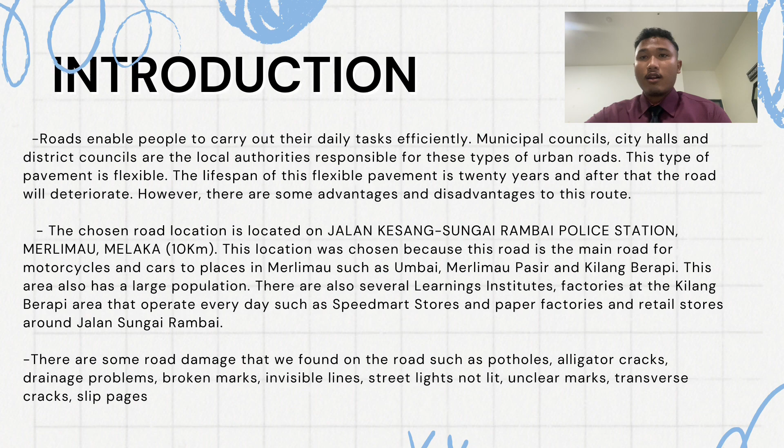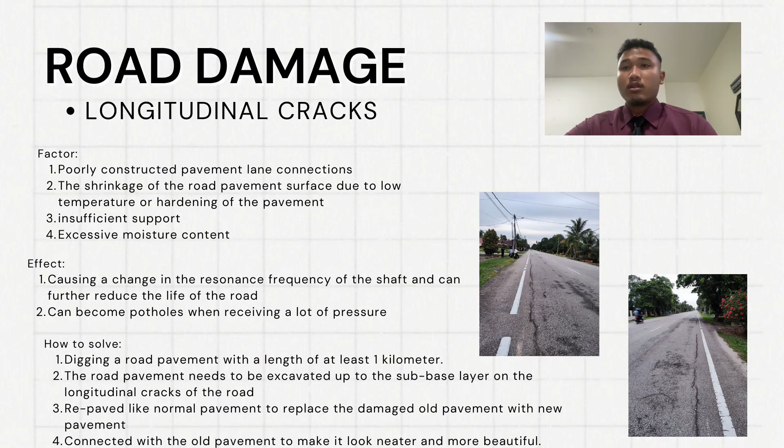At kilometer 1 Jalan Kesang, we found potholes. A pothole is a bowl-shaped hole resulting from local surface distress.

The factor of potholes is that they are caused by fine cracks that are not treated and become wider, until chunks of road surface material are dislodged and form potholes. The water that stagnates in the potholes easily absorbs into the bottom layer, gradually weakening the foundation of the road.

The effect is it can damage tires, cause a bent or broken wheel, loss of hubcap, and wheels out of alignment. It can also cause fatal accidents to motorcyclists when they accidentally pass through it.

How to solve it? Based on the ATJ, first we must make good traffic management during road closure, marking the area to be cut, removing the damaged pavement material, cleaning the cut area, and drying the cut area if wet.

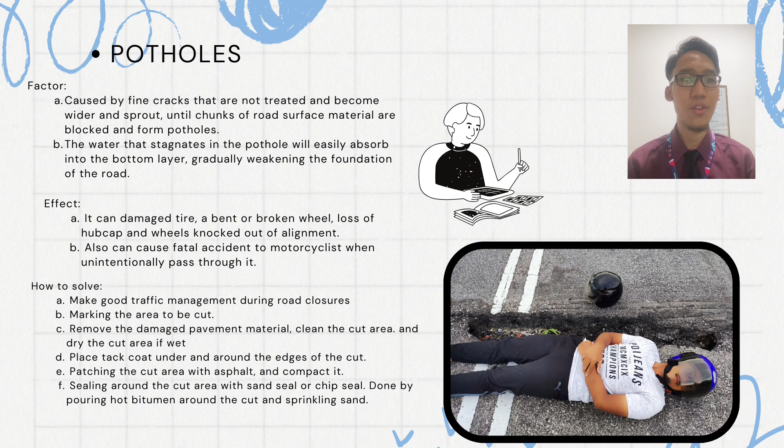Place tack coat under and around the edges of the cut, patching the cut area with asphalt and compact it. Seal around the cut area with sand seal or chip seal, done by pouring hot bitumen around the cut and sprinkling sand. Now I will continue the presentation.

This is road damage that our team found at kilometer 3 at Kesang Johor. There are factors that cause alligator cracking. First, excessive deflection of the asphalt layers. Second, overloading of the asphalt layers from heavy trucks or buses. The third is weakening of the subgrade or unbound layers because of increased moisture.

There are three effects of alligator cracking. The first is causing discomfort driving on the road, especially for motorcyclists. Second, causing a pothole. And last, the road will become sediment.

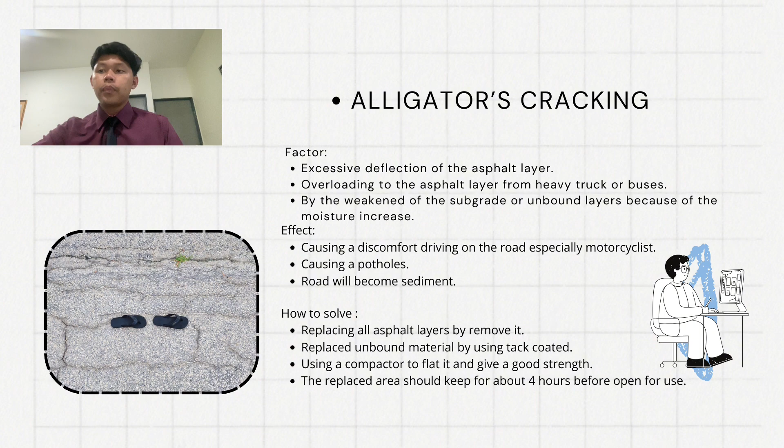So how to solve alligator cracking: number one, replace all asphalt layers by removing it. Next, replace the unbound material by using tack coat. The third is using a compactor to flatten it and give it good strength. And the last step is the replaced area should be kept for about 4 hours before opening for use.

Next is slippage. Slippage was found at kilometer 8 at Sebatu, Melaka. A slippage crack is a crescent shape or half-moon crack that has two ends pointing away from the direction of traffic. Among the factors that cause this slip crack to occur is the use of too much fine aggregate. It occurs when the vehicle brakes or turns the wheel, causing the pavement surface to slide and change shape.

Second, when the surface layer is less dense, the pressure that road pavement receives from vehicles, it will cause precipitation and the occurrence of road cracks. Third is spreading at low temperature, which is when the road pavement shifts at low temperatures, causing cracks to occur.

The slip crack can cause vehicles that hit it to lose control, like a motorcycle. This is because when a motorcycle tire goes through the uneven surface and small gravel stones, it is more dangerous at night because the atmosphere is very dark and the visibility of road users is limited to only the assistant light from the vehicle. So how to fix it?

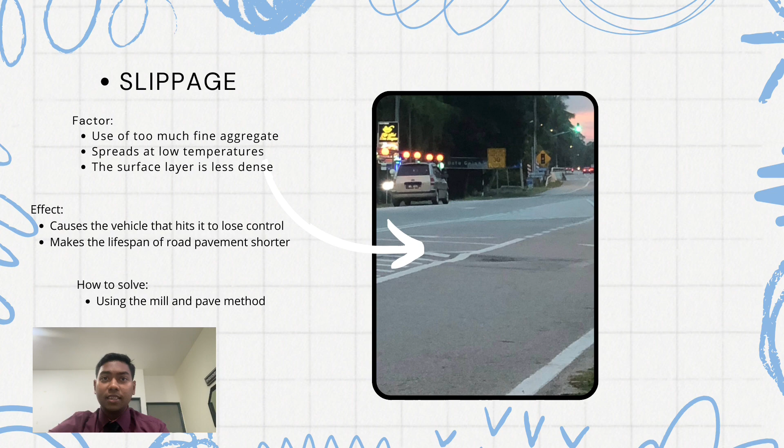One of the ways to fix slippage is to cut and patch off the local damage. If it involves intensive slippage damage, it needs to be treated using the mill and pave method, which is a method of removing the damaged pavement layer and replacing it with a new pavement layer. So the solution is not enough just to patch the existing crack; the drainage system needs to be developed so that the same type of damage does not occur again.

Lastly, in conclusion, road damage can vary depending on the specific context and circumstances. However, generally speaking, road damage can have several negative impacts. It can lead to increased transportation costs, delays, and inconvenience for consumers and business. It also poses safety risks to drivers, pedestrians, and cyclists. Therefore, it is crucial to regularly inspect and maintain roads to minimize damage and ensure safe and efficient transportation infrastructure.

So we should use the road with prudence and caution. Report all road damage to the responsible party for the safety of road users. Good traffic management is always a priority to handle any traffic congestion if there is any emergency problem. Road maintenance should follow the standard operating procedure and carry out routine maintenance, periodic maintenance, and emergency maintenance in a timely manner.